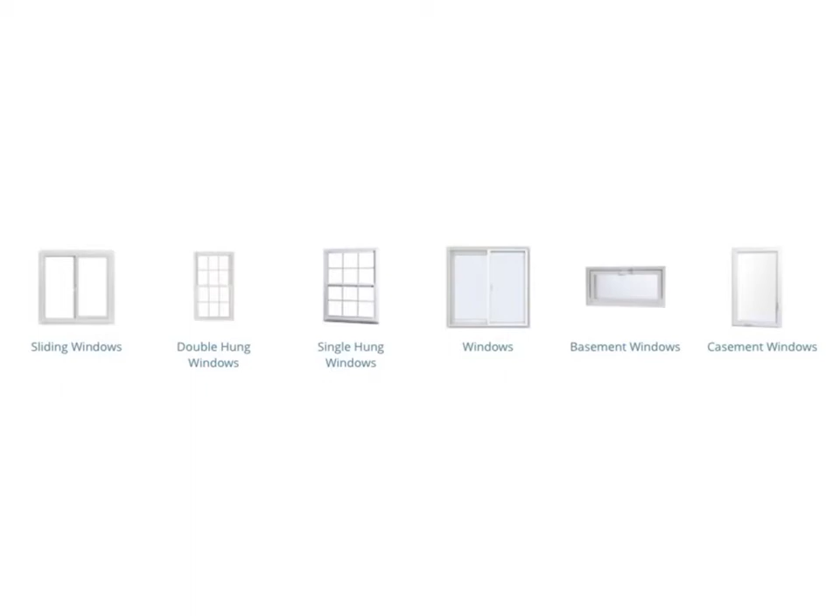For calculating the amount of air that enters the building through windows and doors, we will use these factors: 0.37 per foot of sash crack for windows, 0.5 CFM per square foot of door area for residential doors, and 1 CFM per square foot of door area for non-residential doors. Notice that the infiltration rate for windows is measured per linear foot of sash crack, while the infiltration rate for both types of doors is measured depending on the door area in square feet.

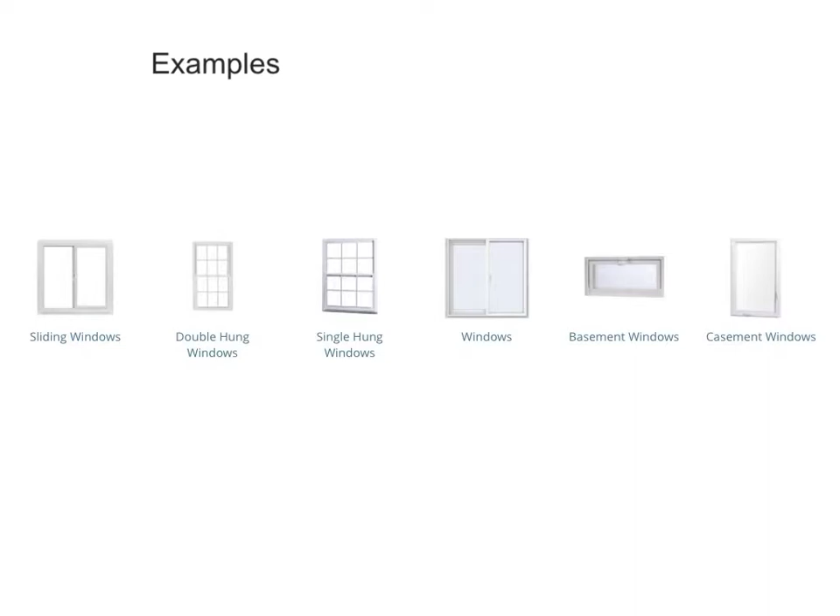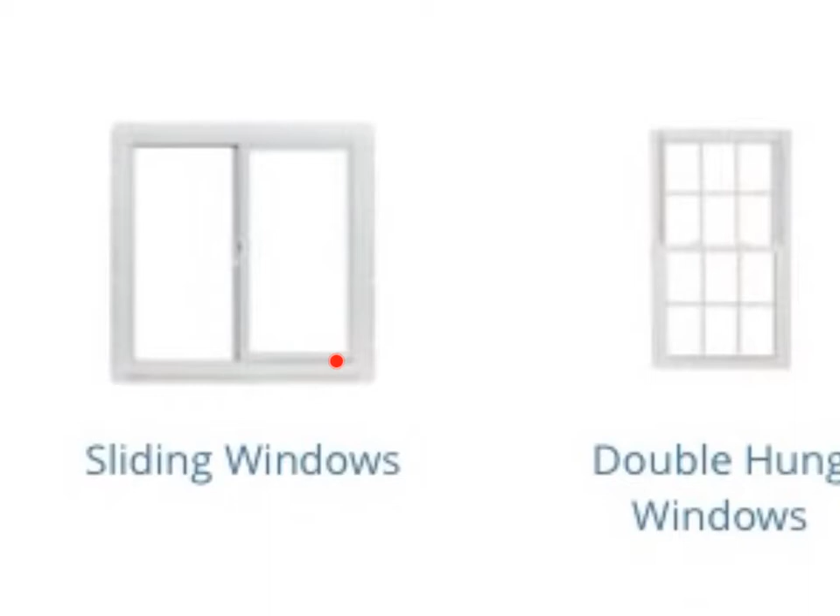Let's look at an example. Let's say we want to evaluate sliding windows. To calculate the sash crack for the sliding window, we first assume that only the left side of this window moves right and left, and the right hand side is fixed, attached to the frame. So if this sliding window measures 6 feet wide by 10 feet tall, the sash crack goes around the perimeter of the section that moves, not the entire window. That section will have 3 feet wide by 10 feet tall, approximately. So the sash crack will be 3 feet on the bottom plus 3 feet on the top plus 10 feet on the left side plus 10 feet on the right side. That means the sash crack is going to measure 26 linear feet.

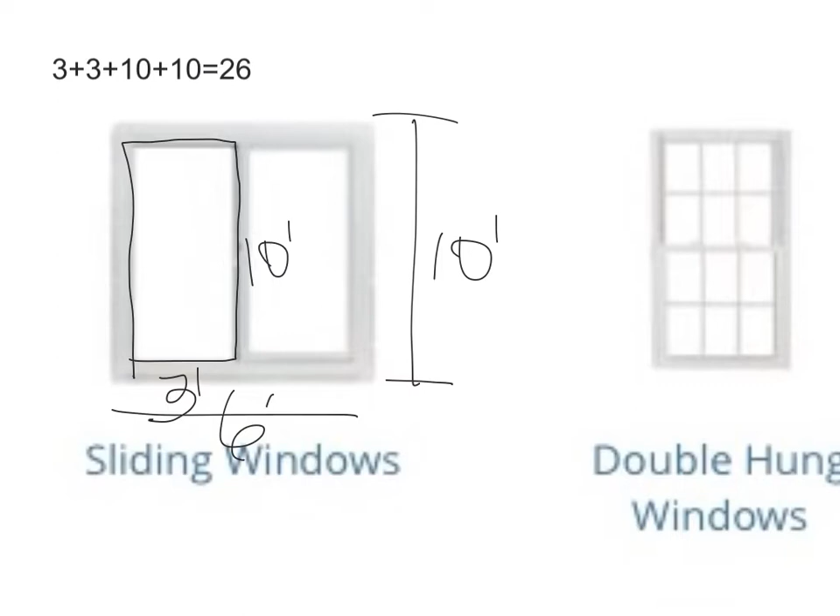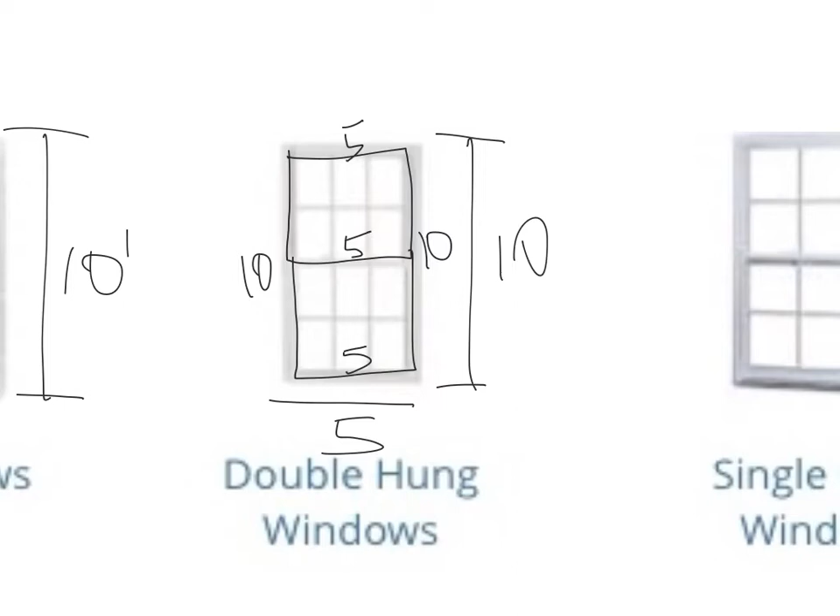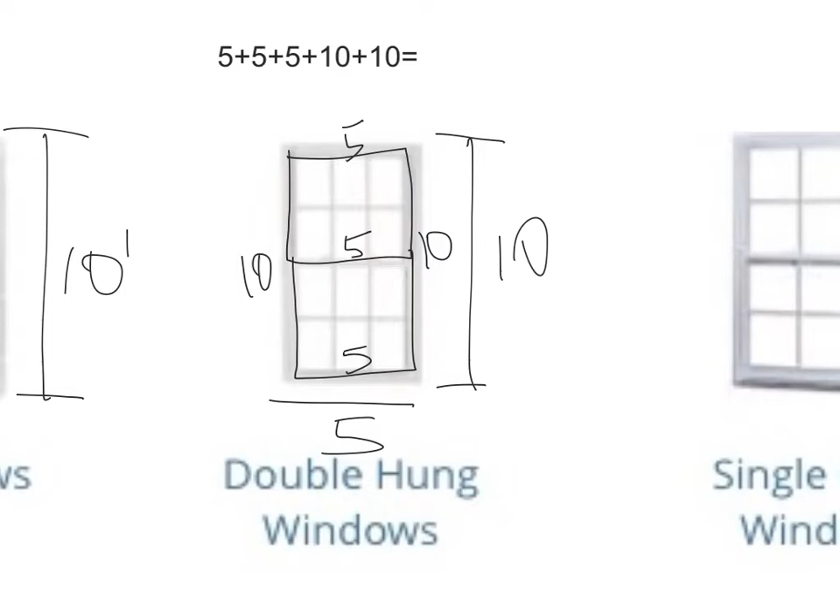Similarly, for a double hung window, now both sections move. The top section can go up and down, and the bottom section can go up and down independently. So if this window measures 5 feet wide by 10 feet tall, the sash crack is going to be the top perimeter plus the bottom perimeter - we don't overlap the center. This will be 5 feet plus 5 feet plus 5 feet on the horizontal side, and then 10 feet on each side of the window. So the sash crack is going to measure 5 plus 5 plus 5 plus 10 plus 10, which is equal to 35 linear feet.

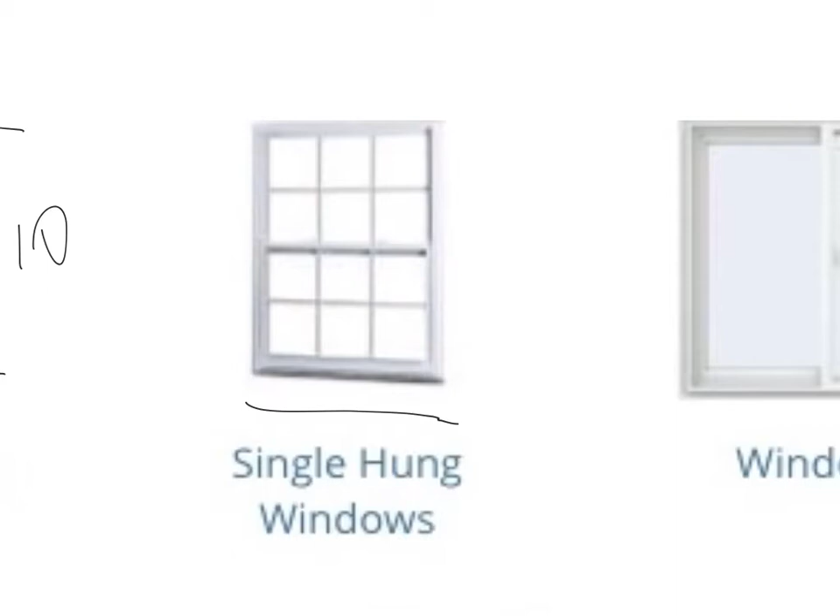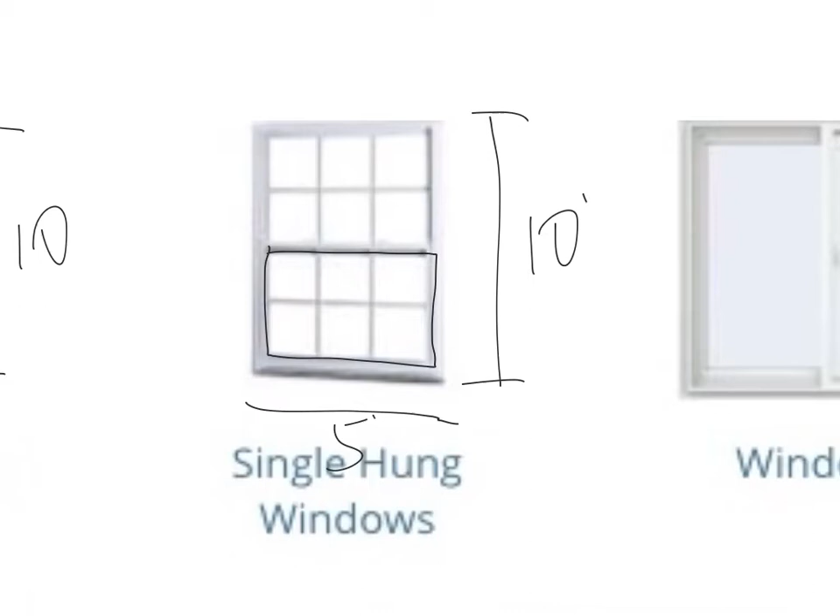Now let's see what happens with the single hung window. In this case, only the bottom portion of the window moves up and down. So if we have a window that measures the same size as before, 5 feet wide and 10 feet tall, we're only interested in the bottom perimeter - this is the part that has a gap where the air can come in. Notice that this section is just half of the entire height, so if the entire height is 10 feet, this bottom section is 5. To find the sash crack, we add 5 for the bottom plus 5 for the side plus 5 for the top plus 5 for the other side, and we get the sash crack perimeter to be 20 linear feet.

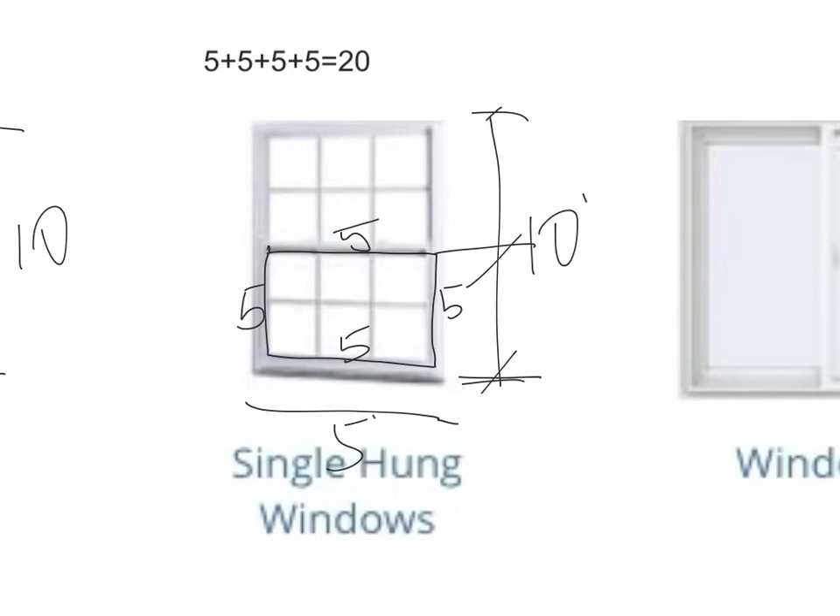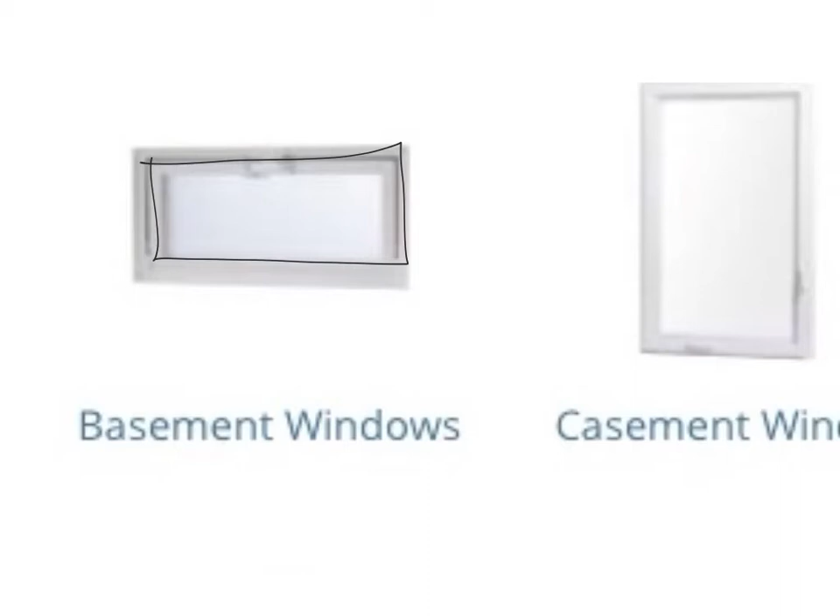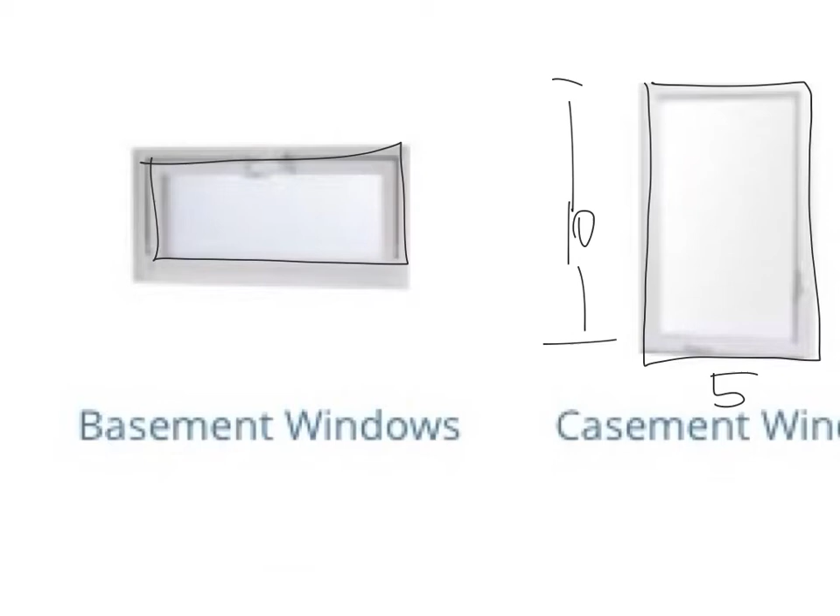For casement windows or basement windows, where the window opens around the entire perimeter, the sash crack is going to be the entire perimeter of that window. So if we have a casement window that measures 5 feet wide by 10 feet tall, to calculate the sash crack we calculate the entire perimeter: 5 for the bottom side plus 5 for the top portion plus 10 for one side plus 10 for the other side, giving us a total length of 30 feet.

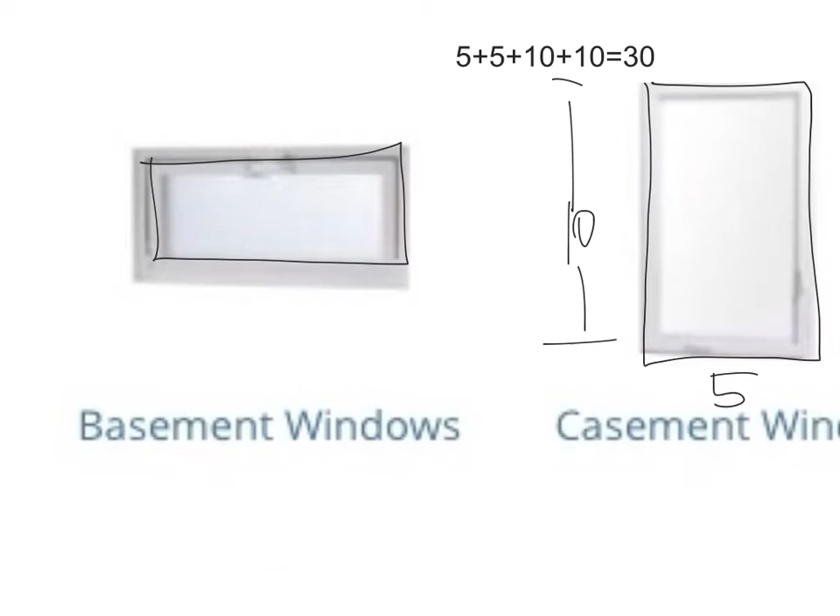Now that we have calculated the sash crack of each window, we can proceed to calculate how much air is coming inside the building through each one. For the first window, we have an infiltration rate of 0.37 multiplied by the length of the crack, which in this case is 26 linear feet. So we get an infiltration rate of 9.62 CFM, cubic feet per minute, which is the infiltration rate through the sliding window that we calculated before.

Similarly, for the double hung window, we're going to have an infiltration rate of 0.37 multiplied by the sash crack, which in this case is 35 feet, so we get 12.95 CFM.

For the single hung window, we're going to get a 0.37 CFM per sash crack multiplied by the sash crack, which in this case is 20 feet, so we get as a result 7.4 CFM.

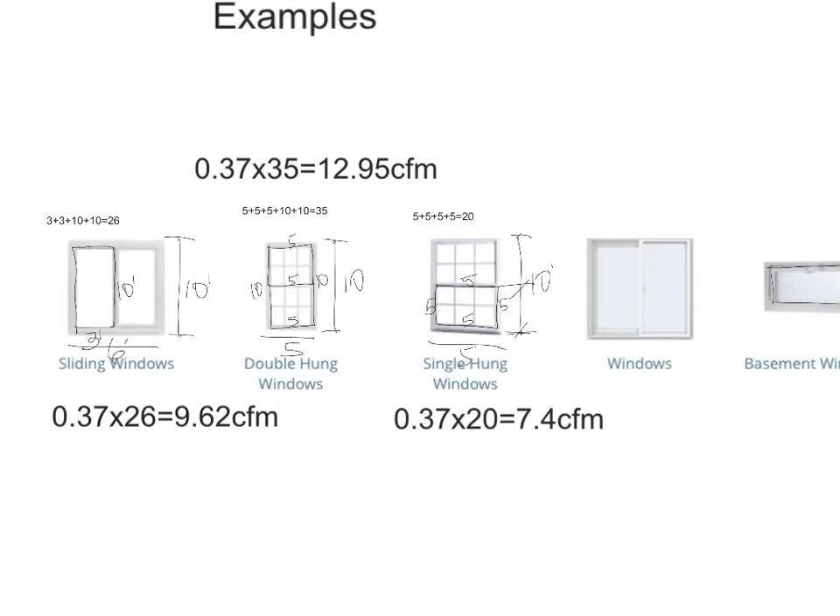Lastly, for the casement window that we had before, we get the infiltration rate of 0.37 multiplied by the length of the sash crack, which is 30 feet. So in this case, we will get 11.1 CFM.

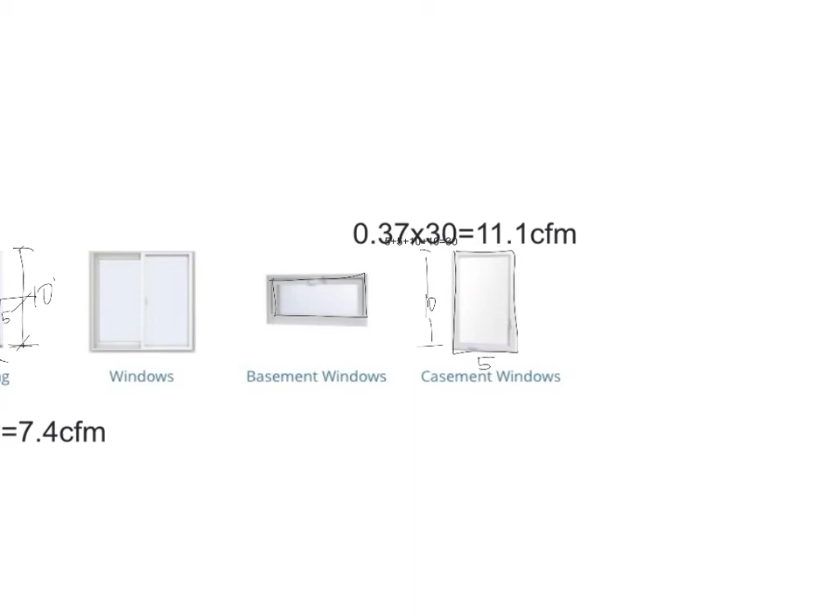We saw how to calculate the infiltration for windows. So we have a 0.37 CFM per foot of sash crack, and we saw how to calculate the sash crack for different windows. In the case of doors, the infiltration rate is a little bit different, because now it's 0.5 CFM per square foot of door area, or 1 CFM per square foot of door area, depending if we're using residential or non-residential doors.

So let's suppose that we have a door that is 3 feet by 7 feet. The area of that door is going to be 3 times 7, which is 21 square feet.

Now, the infiltration rate that we have is going to be 0.5 CFM per square foot of door area multiplied by 21 square feet that this door has, and that's going to be equal to 10.5 CFM. Considering that we're using the residential type of door, which has a 0.5 CFM per square foot of door area.

If we're considering non-residential doors, now we have 1 CFM times 21 square feet. That's going to give us 21 CFM entering the building through that door that is now non-residential. So for residential doors we have 0.5 CFM, and for non-residential doors we have 1 CFM per square foot of door area.

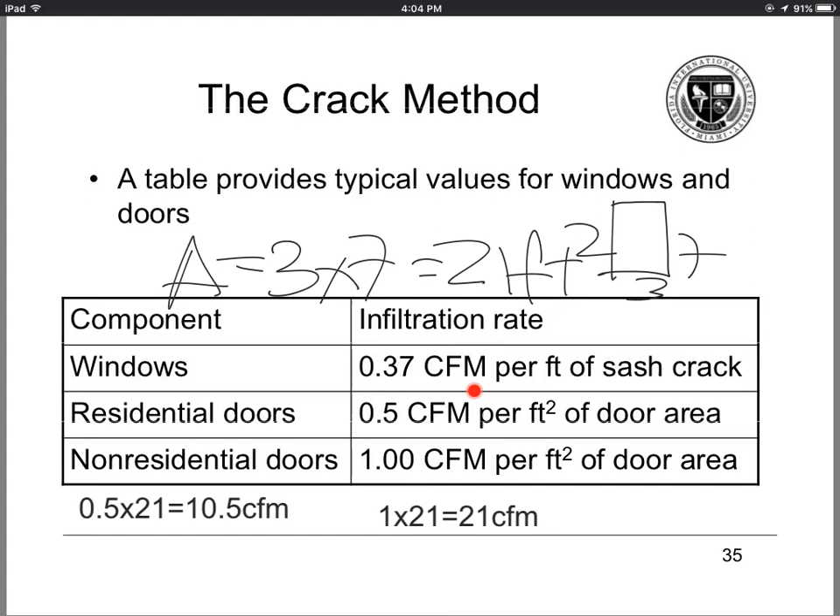Please make sure that you notice that for windows the parameter is per foot of sash crack, so we will use the length of that sash crack. For doors it's per square foot of door area, so we use the door area.

We already determined how to calculate the CFM. So to calculate the sensible load, we will multiply 1.1, which is a constant factor, times the CFM, which is the amount of air that comes through the windows and doors, times the temperature difference. Now this temperature difference depends on the conditions outside of the building and the conditions inside of the building, so for that we need to determine the design temperatures outside and inside.

The temperature difference that we talked about before depends on the outside and the inside conditions. The indoor design conditions are the conditions inside the building. So for winter we're going to assume 68 degrees temperature dry bulb, and for summer we're going to assume 78 degrees of temperature for dry bulb. The relative humidity for the wintertime we will assume 30%, and for the summertime we will assume 50%.

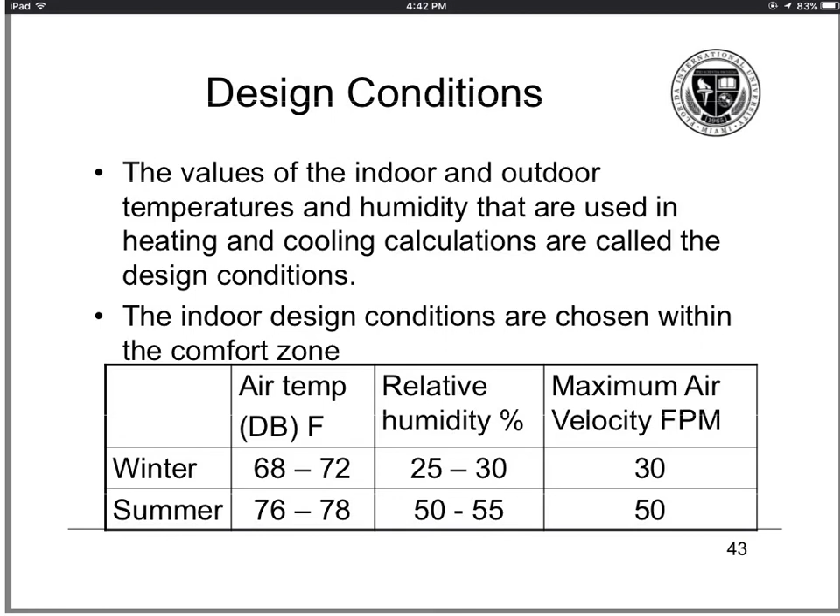That's going to allow us to calculate the amount of heat that the building needs to provide during wintertime, or the amount of cooling that the system needs to provide during summertime due to changes in temperature of the air coming from the outside to the inside.

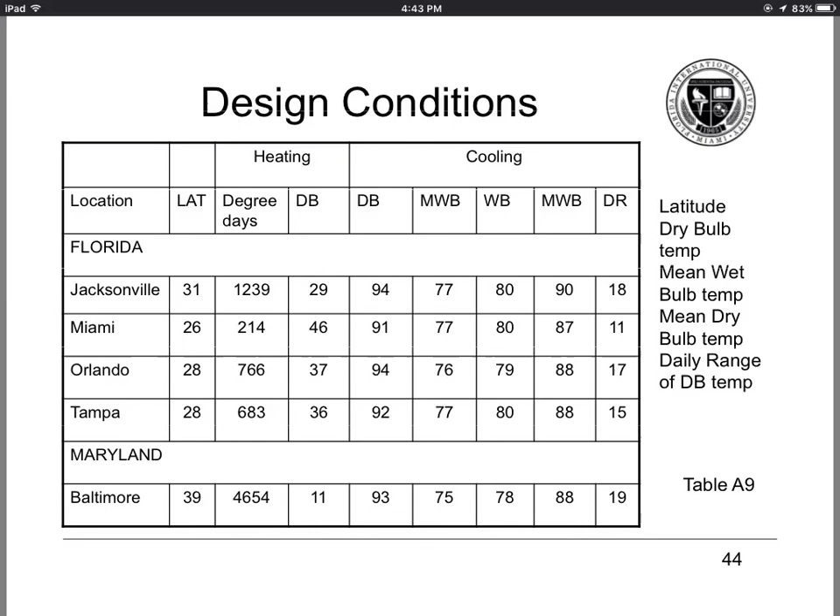For the conditions outside of the building, we will depend on the location. In our case, we are in Miami, Florida, and when we're dealing with heating, the outside dry bulb is going to be 46 degrees Fahrenheit. For cooling, used during summertime, we're going to assume that the temperature outside is 91 degrees Fahrenheit.

So the temperature difference that we're going to use will depend on the time of the year. For winter conditions, we are going to use a temperature difference of 68 minus 46, which is equal to 22 degrees Fahrenheit. For the summer, we're going to use a temperature difference of 91, which is the temperature outside in Miami, minus 78, which is the temperature we're setting for the comfort zone inside the room, and that's going to be equal to 13 degrees Fahrenheit.

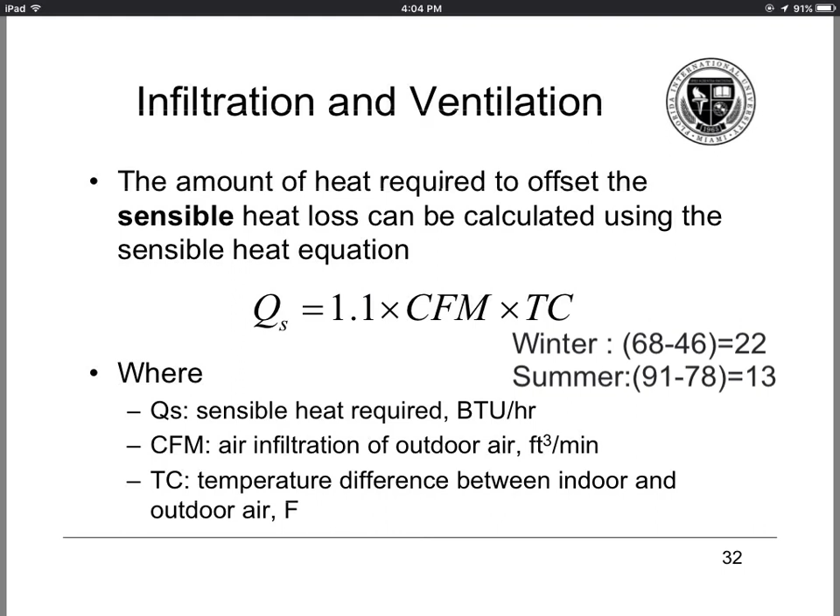So those are the assumptions that we will use to calculate the sensible load due to infiltration when we know the CFM, because we calculated using the sash crack, and the temperature difference will be one of these two, depending if we're in winter conditions or summer conditions.

The humidity ratio depends on the conditions of the dry bulb and the wet bulb or relative humidity. So during summer, we are going to assume that the humidity ratio difference is 38 minus 30, which is equal to 8. During the wintertime, we're going to assume that the conditions for the humidity ratio are 138 minus 70, which is equal to 68.

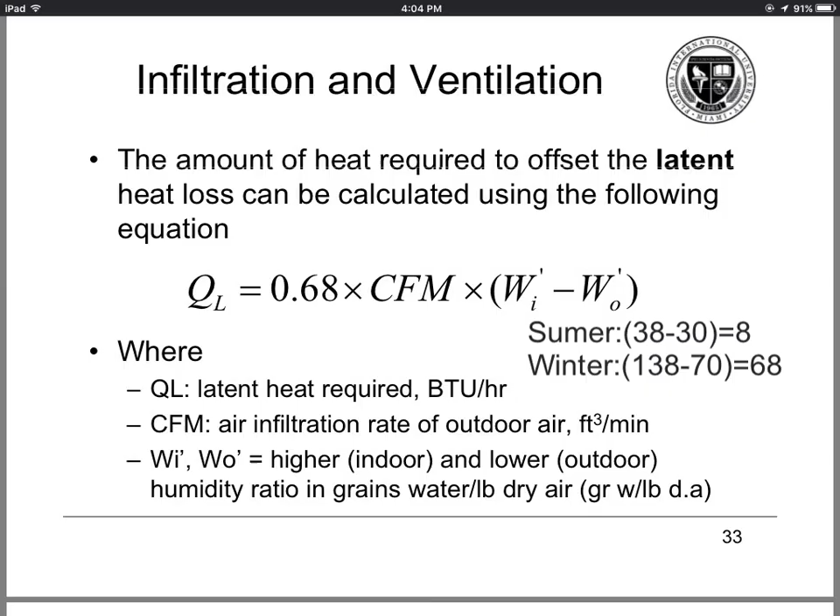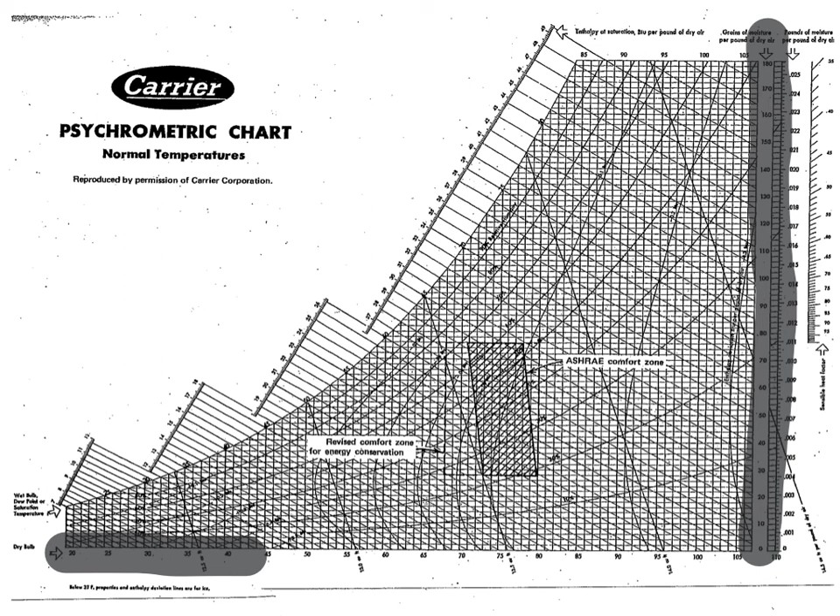These determinations depend on the conditions for the outside and the inside of the building. Remember the humidity ratio is calculated on this scale here, depends on the dry bulb, which is measured here, and sometimes the wet bulb, which is across this line, or the relative humidity, which are the lines that come in these directions. So depending on the conditions outside for different cities, or the conditions inside for the comfort zone, the humidity ratio is just directly read from the psychrometric chart.